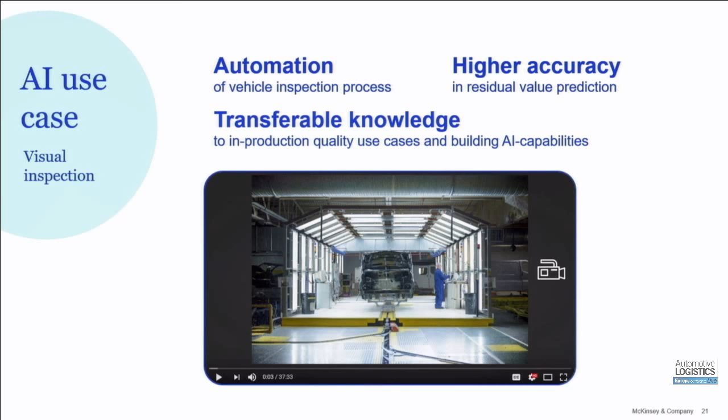You can automate that with deep learning and neural networks, because the technology looks at the different images and can then, based on learning it, recognize that a bump in the C-pillar of a car has a different impact on the residual value than a bump on the hood of the car, for example.

Another case, to make it a little more supply chain management specific, could be managing disruptions within the supply chain, and actually predicting disruptions to find solutions earlier.

Now I'm coming back to the story that I'm actually very happy to be here today on time, because I experienced that myself yesterday flying here. I wasn't the only one coming from Munich, but our flight actually landed at a quarter after one in the morning, which was due to incoming flights being disrupted by thunderstorms. But if I had known that already at 6 or 7 p.m. the evening before, I would have probably taken another means of transport. So there's tremendous value in doing predictive scheduling, trying to predict disruptions, and then being able to respond earlier.

Which I think is super interesting for the supply chain as well. So in total, there is a lot of value in the technology. We are convinced of that, and the question then is, how can I get to that value? It means that you, your fellow co-workers, and your companies need to find a way to bring that into the company. I'm deeply convinced, based on what we've seen working with a couple of OEMs on AI pilots and specific use cases, that you will only be able to monetize on that value if you transform and bring it into the company.

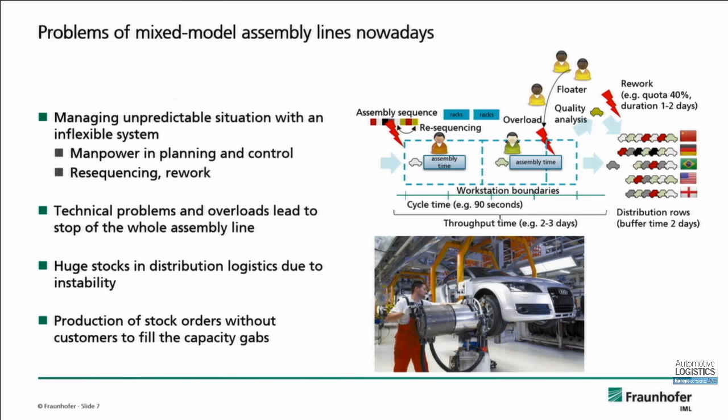So this is actually the classic assembly line of car makers. You know them, very efficient, a lot of workstations, deeply coupled. You produce a car in a very short time there. You have to install the parts in the different workstations. Efficient but very rigid. So if something happens, if a part is not there in the right time, or if some station gets problems, then you have normally the option to stop the line, or you go into rework at the end of the station.

This is actually what happens more and more in the automotive industry. We have quotas of 40% rework in the automotive industry. So we have a very efficient system, but in the end, we are doing a lot of the work outside of this efficient system with manual firefighting, because we have to react to the changes of the world. But these disruptions are not part of the system. The system is not made for disruption, it's just made for working perfectly with the plan you made.

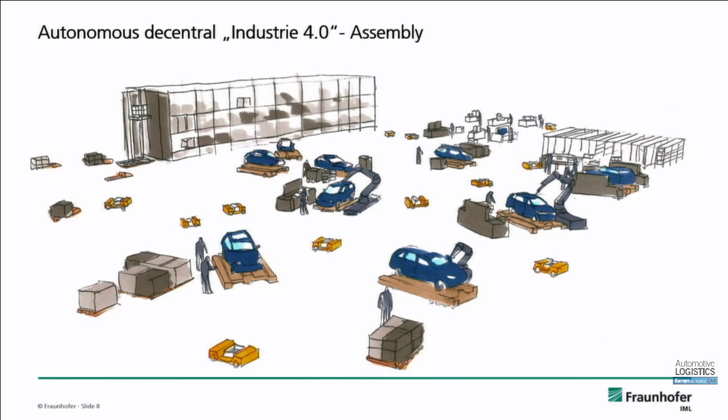So we had a rather great and big research project with Volkswagen, Continental, etc. And we were thinking about how can we reorganize this. We said, okay, we take out this rigid line and we put different production islands on the surface, and we connect them by AGVs that pass from one station to another, and they can decide freely by communicating with each other where is capacity, where are the parts, etc., and then come up with a very flexible environment.

You can see it a bit more technically. On the left side, you have the AGV with the chassis, and the AGV is then communicating with the different workstations, knows its path, communicating with the stock, and then knowing, okay, everything is there, I can choose this workstation right now, and if the part is not there, then I choose another workstation.

Now in this system, as you can see, the disruption of parts is not there. A workstation gets down, it's actually integrated in the system. So you won't stop other cars from being produced. You even won't stop your own car if a part is missing. You can go on and produce this.

As you can see, you lose efficiency because you get larger ways, transport ways there. But you only lose efficiency if you think about a non-disruptive system. If you think about the disruptive system where you have a lot of rework in the end, then obviously you gain efficiency in the end.

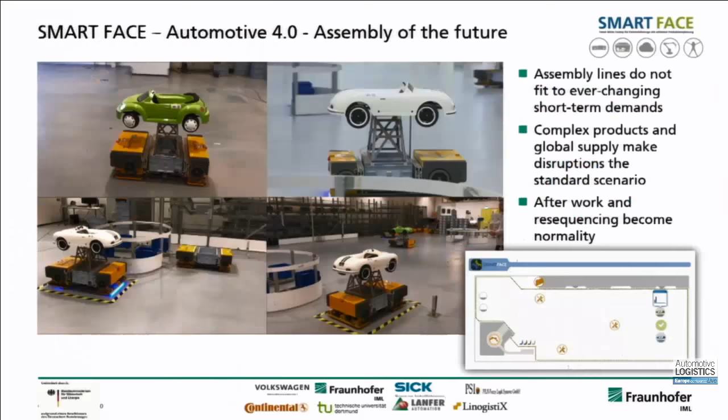So what did we do? We performed a demonstrator that you can see here with some little toy cars from Volkswagen on these AGVs in our laboratories. The visitor can configure their cars, so they can just choose, like in the real world on a tablet, what options do they want, what chassis do they want. Then we put the chassis on the AGV, and then the AGV starts communicating with the workstations. As you can see here, our students have a tablet, and they know what 3D printed parts they have to install there, so there are some variants.

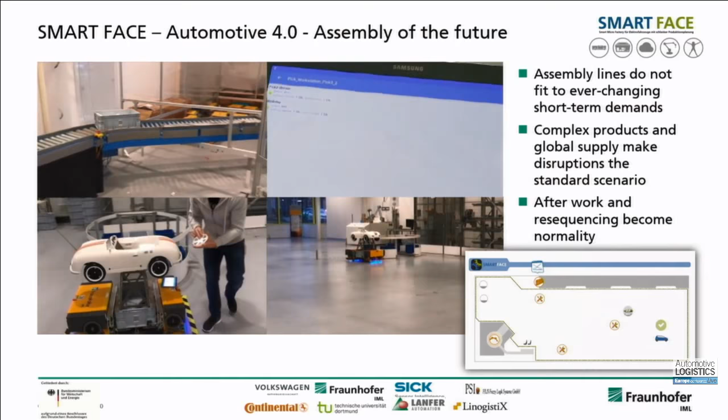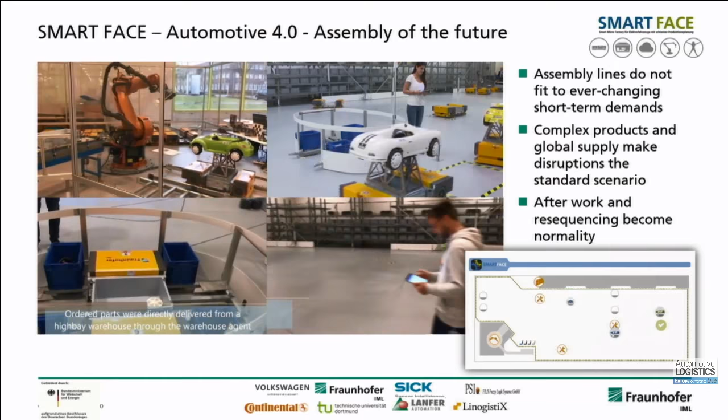The same AGVs also can go into the rack behind and take out some individual parts and bring them to the line. And as you can imagine, since the visitors don't have to pay for their car, they always choose like the Porsche with the sportive items there. So we had a lot of individual parts that had to be transported. You see it here down. Up there you also see a robot collaboration, like an installment of a seat in this little car.

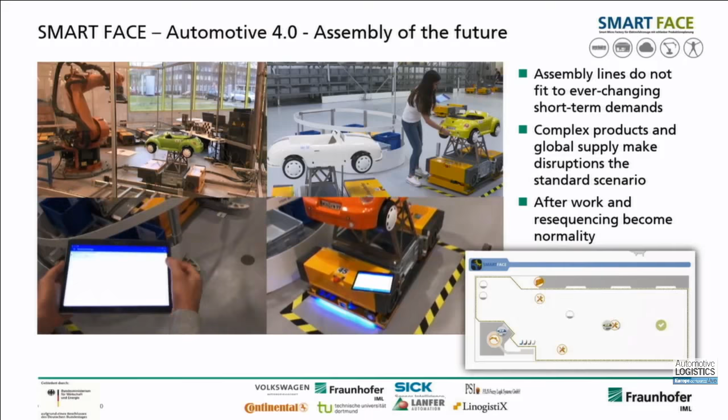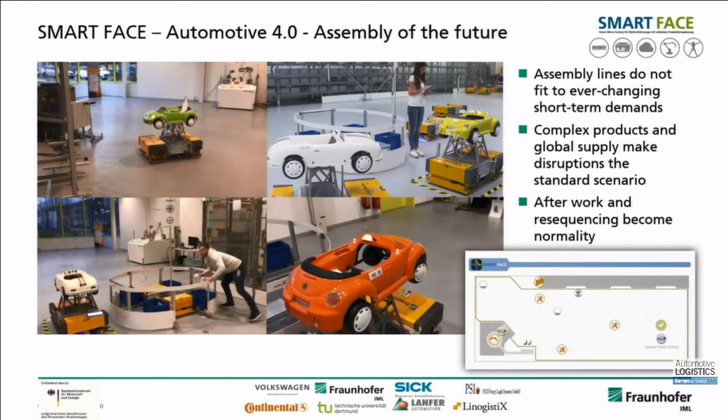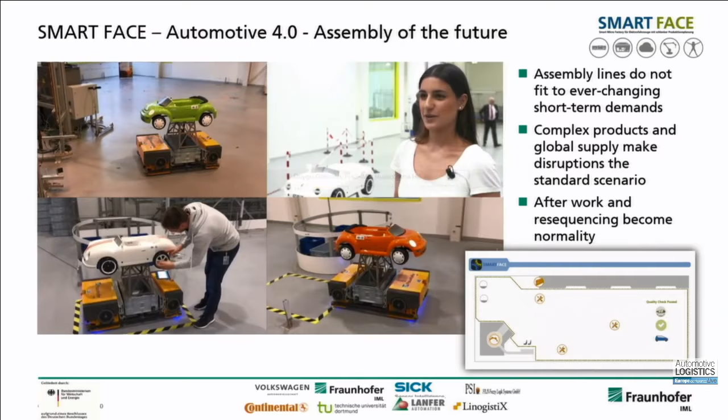What was actually remarkable was that such a system could be demonstrated within the limited resources of such a research project. So firstly, we could show it's working. Secondly, we could show that visibility, which you see on the right bottom, was gained out of the system because all the information the system needed only had to be displayed for the human. So you know in every second what the car does, what the AGV does, and which direction it takes, even though you can't predict it because they decide very decentrally and locally.

And thirdly, which was very interesting, it was a very robust system. After the presentation, 30 people went onto the shop floor making photos, putting cameras on the robots and whatever, but the system didn't stop. Maybe an AGV stopped because there was somebody in the way or something, but in the end everything was working. So with this decentralized approach, the cells keep working, and so the whole system keeps working. Even though, as you can imagine for a research project, it was finished at midnight the night before, so it was not, let's say, the most mature system that we had there.

What's now interesting, and even for us it was interesting, is that when I presented this two years ago, I think the comments in the industry were more like, oh yeah, okay, don't kill Henry Ford, and where will we go with this?

As far as I know, Audi is financing and working together with a startup of about 30 people, thinking about algorithms to do it efficiently, thinking about simulation. This is something we are also investigating right now, to simulate such systems, because they are very complex, and you have to get some understanding about this.

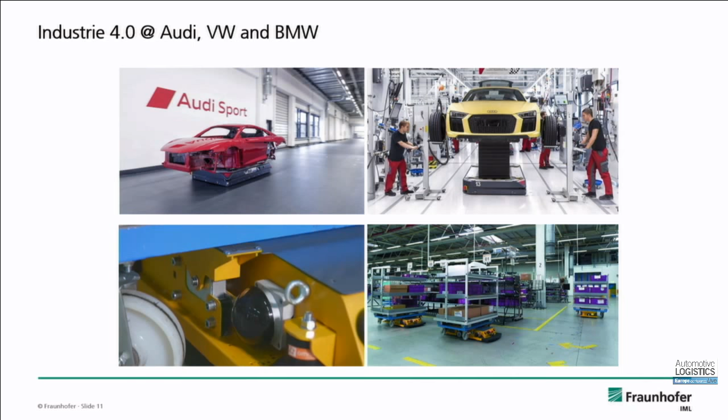Now the question is to go into the supply chain. What happens if this autonomous car goes into the supply chain and has to be transported to the customer? In the end, you can say it meets other legal entities, transport providers, harbor authorities, or whatever. Then there's an interesting question about contracts, and also about how to finance these kinds of things. Here we are talking a lot about blockchain and smart contracts.

This is basic research that's a bit far ahead. Can such things make a contract? We are working with legal professors, and they say this is a very interesting question, because things can't make a contract on their own. We have frame contracts, and you know from stock markets that computers make trades, but this is actually very easy because you either go for it or you don't. These kinds of contracts are very complex, with special conditions, payment terms, etc. So can we negotiate these kinds of contracts?

In the end, can a computer negotiate a contract? Can we make a contract in such a way that a computer can read it, understand it, and negotiate it? If we can do this, I think we can also solve a lot of problems we have nowadays in the supply chain, like bill checking. I know in Wolfsburg a lot of people working on this kind of checking bills from suppliers and providers, etc.

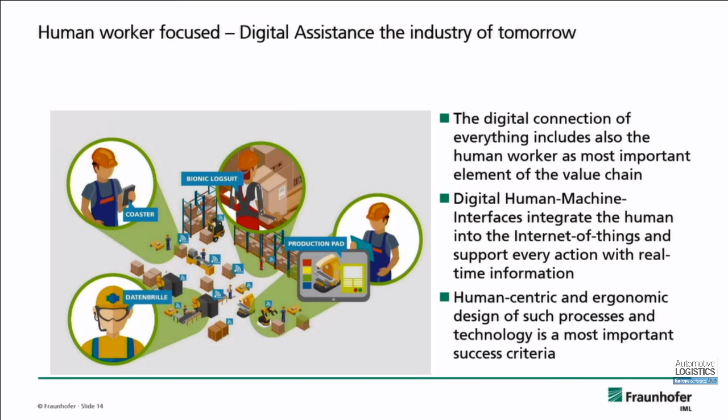Let's not forget the human. I talked a lot about robots, autonomous things, algorithms, but in the end, all the digital world we're creating behind the scenes cannot be seen by humans, so we need to integrate the human with interfaces into this world. We have to make them able to see what's happening there. This is not a problem for the future, it's already a problem nowadays, and has been a problem since we started putting algorithms into our plants. This is a very important factor, and there are several ways we are investigating to do it.

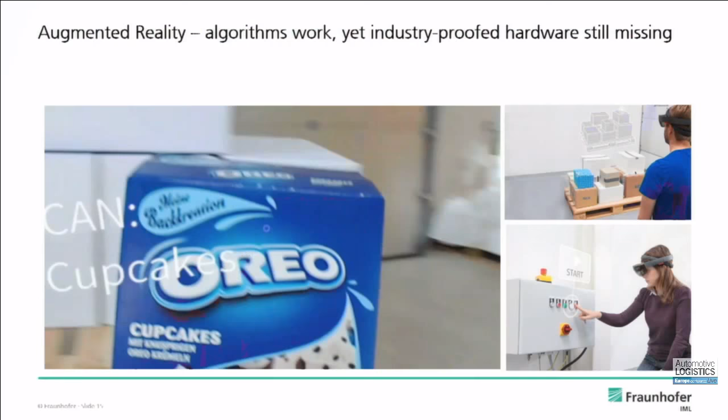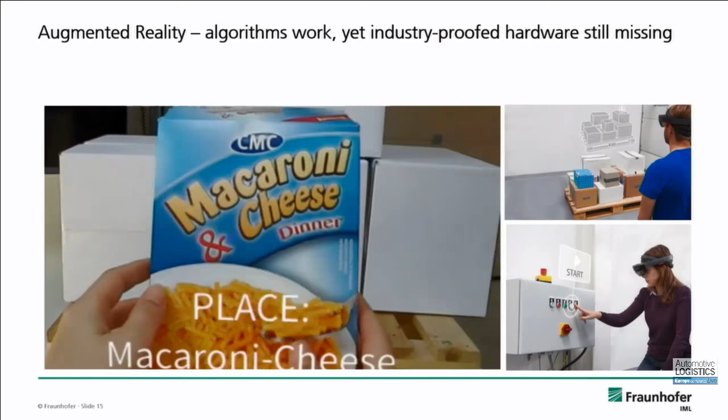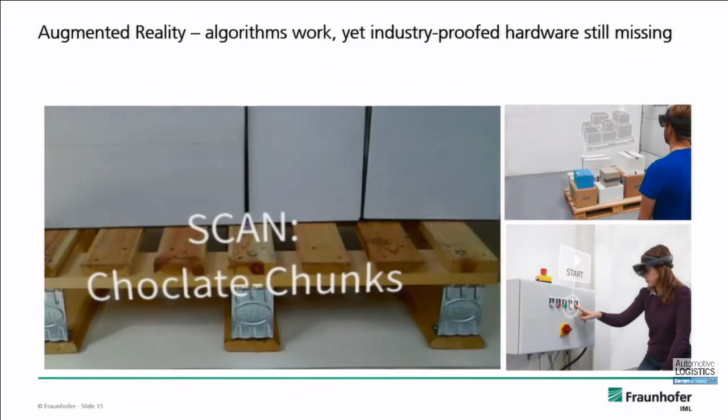The best option right now to think about would be augmented reality, if we at least get the technology hardware that works. Algorithms do work, as you can see here — we have combined a packing scheme where you have an optimal packing for a box with an AR algorithm, and then you get shown where to put the different boxes. You don't need barcodes because you recognize everything with pattern recognition, also AR algorithms, and then you put them in the different boxes. With AR, you can display everything happening in the digital world to the human worker. Combined with sounds and chatbots, you get whole information transparency.

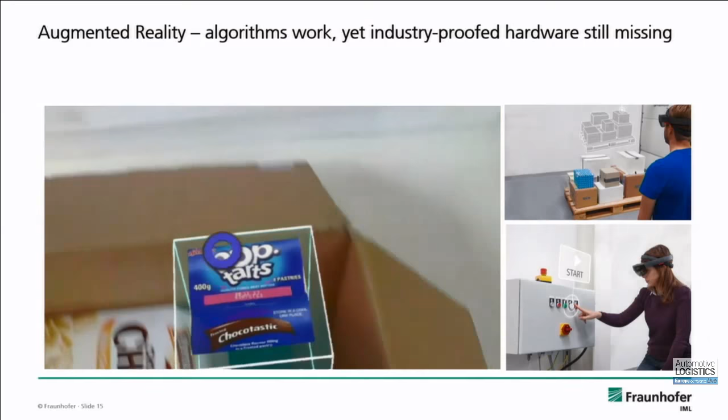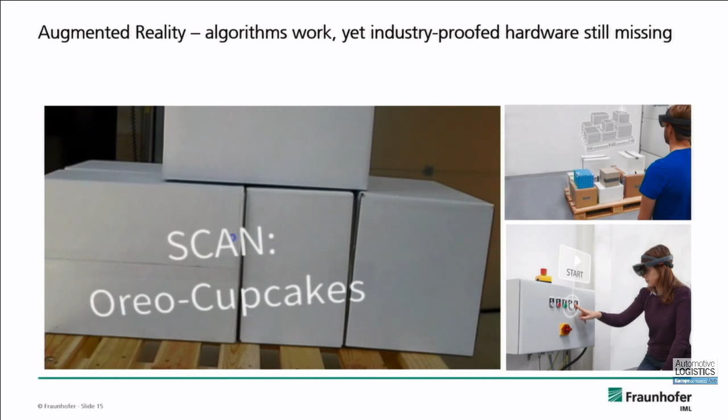So I think the whole industry is waiting for technology providers to actually deliver industry-proven hardware that can be used on the shop floor. So please, if there are some technology providers, go for it. This is a problem because we work with a lot of technology providers and they have other product cycle times. We talk with some German people and they say, oh no, we have product cycle times of 7 years. And I say, guys, you can't develop for 7 years on such new technology, you'll have 3 new technologies on the way. You have to be fast there. So this is something I think we are waiting for.

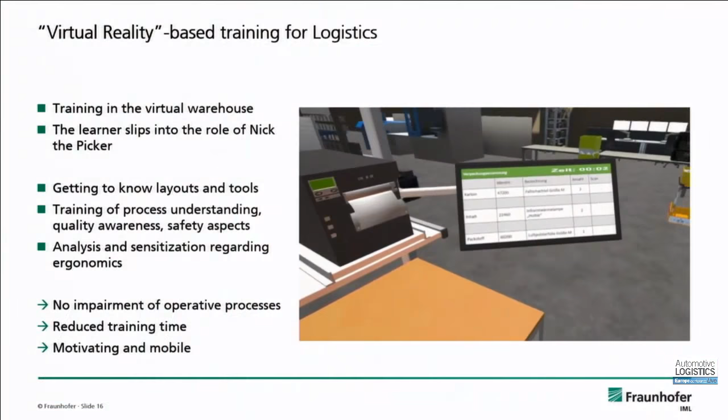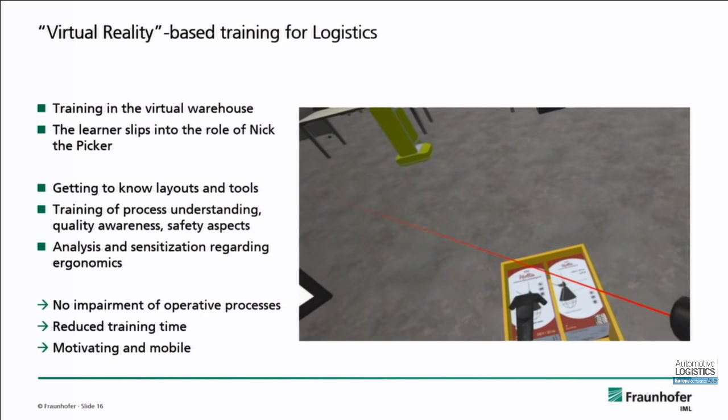Another thing is obviously training. This is something we do also together with customers. This is Picnic, a virtual training environment, as you can see here with a green screen. People are working in a virtual environment, learning the processes. We also apply some game concepts, gamification, where you get points, compete against each other, and get motivated by these kinds of training. And you can actually also use this not only for people who start new in your company, but also if you have standard processes, new SAP or whatever, and you want to spread it out to all your plants worldwide, then it's maybe easier to do it virtually than going there with your experts to explain everything. I think this is something a lot of companies right now are going for.

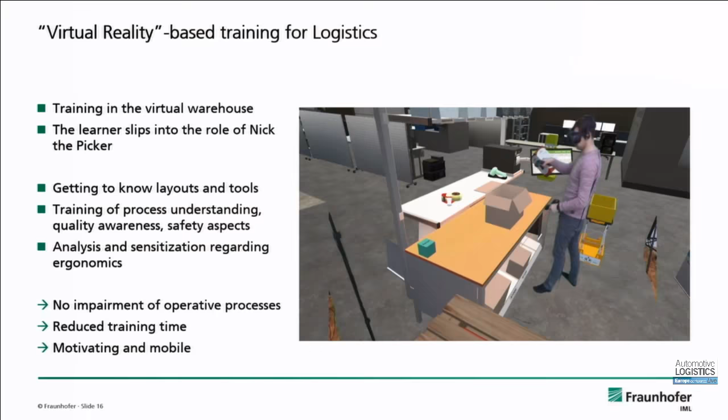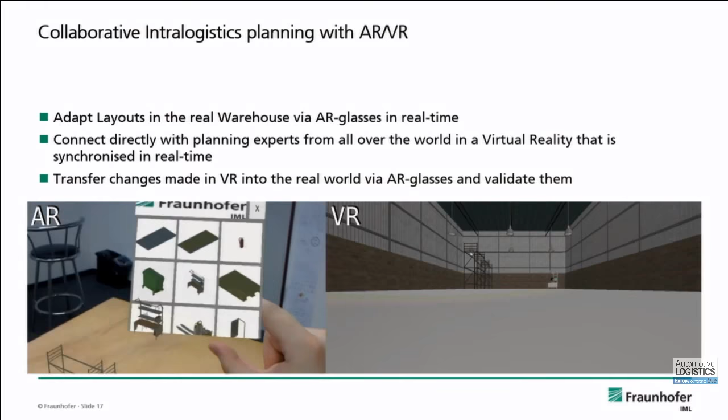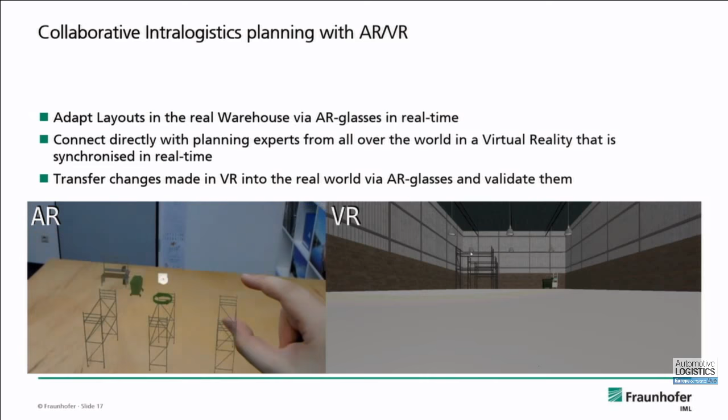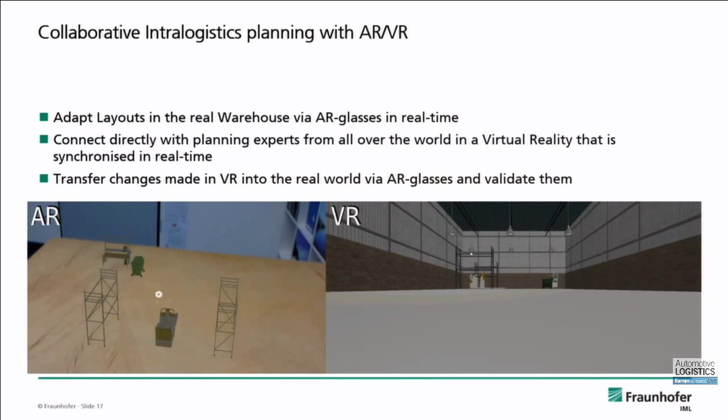Last but not least, this is an application for planning. Imagine the guy on the left side standing in a warehouse, applying virtual components into the warehouse. He's replanning the warehouse, putting in racks, forklifts, and maybe also the processes, how they move together. On the other half of the world, you have maybe the experts in a virtual environment, and they get connected in real time, see everything in the virtual environment, and can interact and say, okay no, that's a bad place, let's put it like here. They are creating together the digital twin in the end, because they are creating the warehouse planning. You can use the same model then for training, for simulation, or whatever. I think some German OEMs are also working on a smaller scale on these kinds of things.

So we believe that the future vision is not one where we don't see any human workers on the shop floor. Maybe that's some vision for, I don't know, 100 years from now, but in the short term we see a so-called social networked industry where humans and autonomous things - that may be robots, that may be AGVs, but that may also be algorithms - work together hand in hand in a very flexible way. The autonomous things are here for the standard tasks, and humans can always do the special tasks, the tasks where you need creativity, where you need the flexibility that we as humans have, handling the exceptions, etc. So there's always this kind of combination. And if you all know about automation, it's very difficult to 100% automate a factory. You always have these exceptions, and humans are a very important part.

When we talk about this scenario, and this is right now what we do in the Institute, it's not sufficient to only let engineers and computer scientists think about these kinds of things, because we are defining new rules for how humans and robots will work together in the future. So we actually group up with sociologists from work science, but also with psychologists, etc., investigating how these rules develop, and this can't stop in our institute - it must actually, in the end, be a society-wide discussion.

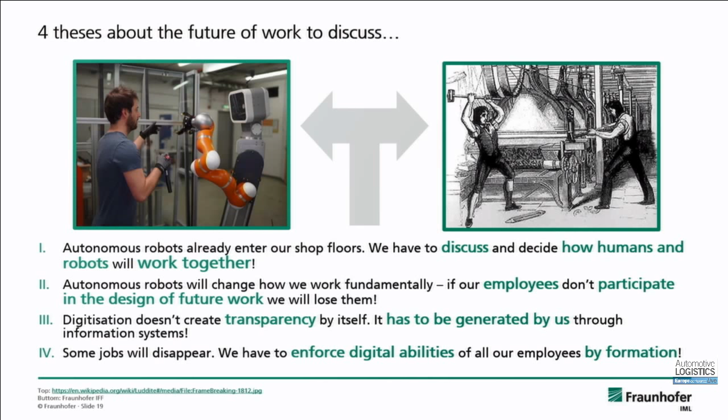There's a lot to gain here, but I think we have to do it right, and we have to take the people with us. We have seen autonomous robots enter the shop floor, so we have to think right now about how we work together with these kinds of things. I think some of you OEMs are thinking about it: how do I integrate these AGVs in my factories, how do I work together with the people working there.

Autonomous behavior of algorithms and of robots is something new. This is not another tool that we get, not a crowbar or whatever. They are taking decisions, and this is something new, so we have to involve our employees in this process. They have to participate, have to decide how we want to work with it, who has the last word in the end. There are important discussions to be made, and it can't be decided just by the computer scientist who programs the robot. He will do it, because he has to, but he needs some frame rules.

Certainly, and I think this is very important: digitization by itself doesn't create transparency. If you take decisions and put them in a deep learning neural network, you get a big black box, and you don't know what's happening there. You just get the result in the end. So there's no transparency about it.

And this is also true for a lot of the SAP production planning systems that we are using right now. So I think we have to create the IT system in such a way that we actually understand what they are doing. There are matters, but we have to put money in to do this in the end, so as not to lose control.

It's important. At the universities, we now have research areas trying to find out how a neural network works once it has learned something. What is it? What happens in it? How does it make decisions? A very important factor. And in the end, some jobs will disappear.